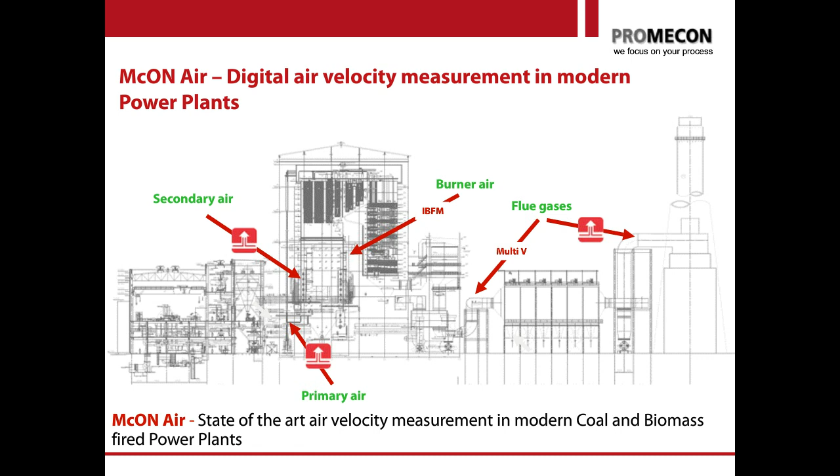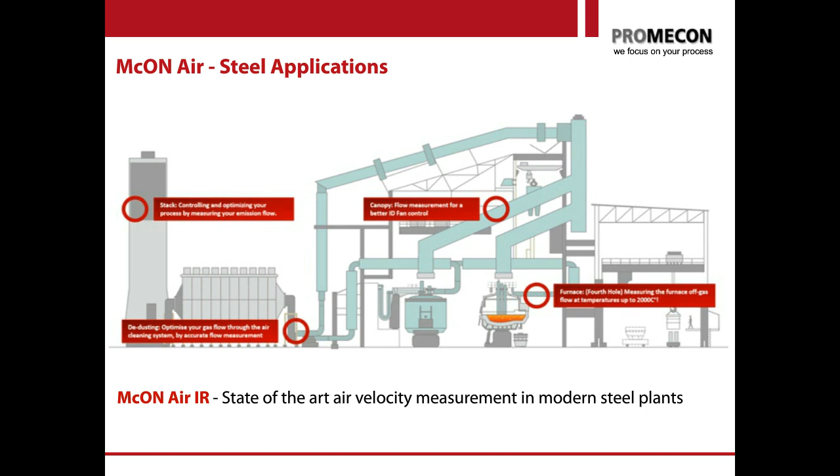So in all these industries, in these three industries I'm going to talk about and address today, we have a big interest to know the gas flow of fresh gas as well as raw gas.

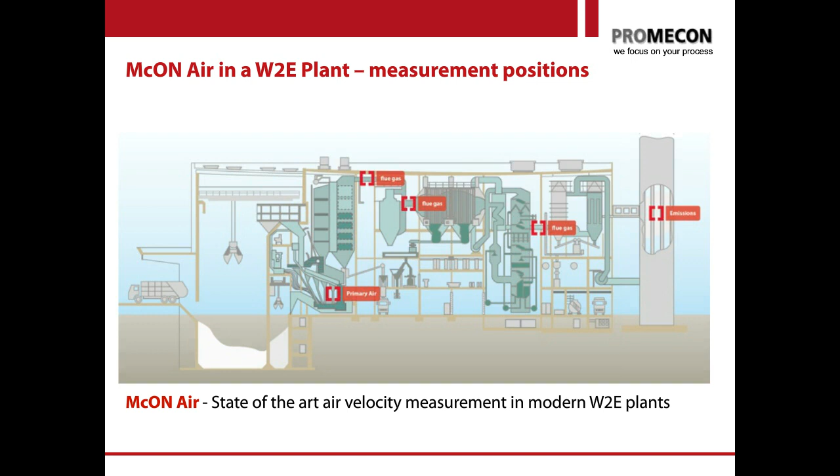Now, before I start with our measurement, I would like to give you a little bit of an idea of what are the typical problems in power stations. And I have to tell you, many of these problems are undetected. If you ask somebody from the steel industry about electric arc furnace, he will tell you, well, the gas is so hot we can't even measure it. So that problem is apparent and it's clear.

In a power station, it's a bit more difficult, because many airflow measurement problems and many airflow measurement drift problems go undetected. I would like to explain that for a few minutes so everybody is clear on what the problem really is in a power station and why it is so hard to tackle.

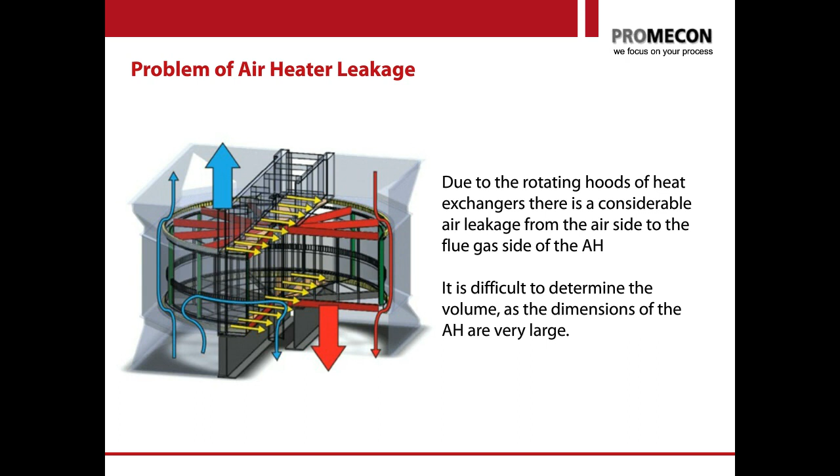Most boilers have an air heater that heats up the air going into the boiler, so that you recover the heat that the boiler is losing. That air heater is usually a regenerative or rotating air heater, and this regenerative air heater is leaking ash from the flue gas side into the fresh air side. So all the preheated air coming into your duct system will catch up some dust from the firing process. Now, it is easy to understand that this dust in the air will start to give you problems with your instrumentation, the instrumentation that measures your airflow, the conventional analog instruments that you are using today. Let me show you how this problem then manifests itself in your process.

The way you measure the airflow traditionally, for the past 100 years, is using the Bernoulli equation. You have an obstruction in the duct, and you measure the delta pressure over this obstruction: the static pressure ahead of the venturi, and the dynamic pressure in the venturi throat section.

Typically, this delta pressure is around 20 millibar for venturis. If you are using Annubars or some profile sensors, the delta pressure is even far lower, only 2 or 3 millibar.

Why is that important? First, you have a squared relationship between the pressure and the flow. That means at normal flow, you have normal pressures around 20 millibar. As soon as your flow drops to, say, a quarter, your pressure drops by the squared law. So for very low flows, you measure nearly no pressure anymore. The first problem is that you do not have a linear relationship between the measured pressure and the flow you are seeing.

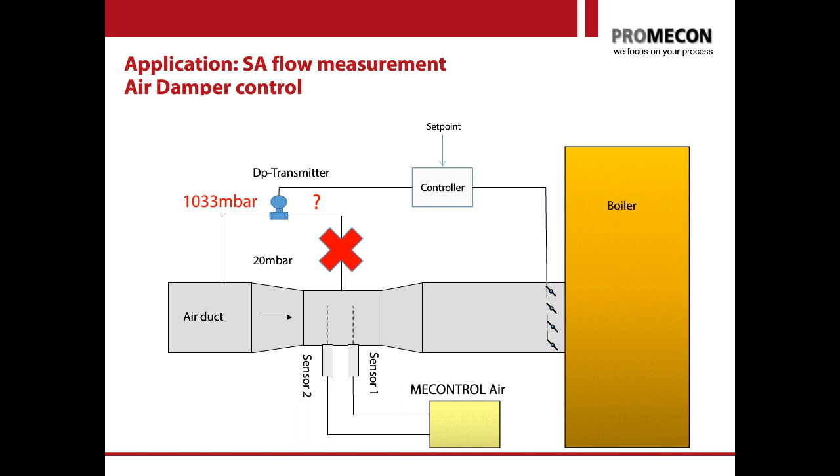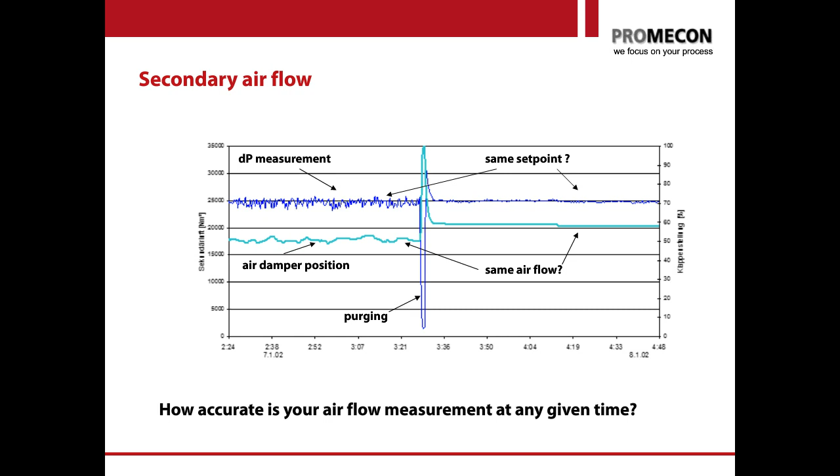Digital measurements like the PROMECON measurements do not drift. They never drift. They cannot drift. And therefore, digital measurements help you to keep your boiler on track. This is problem number 1.

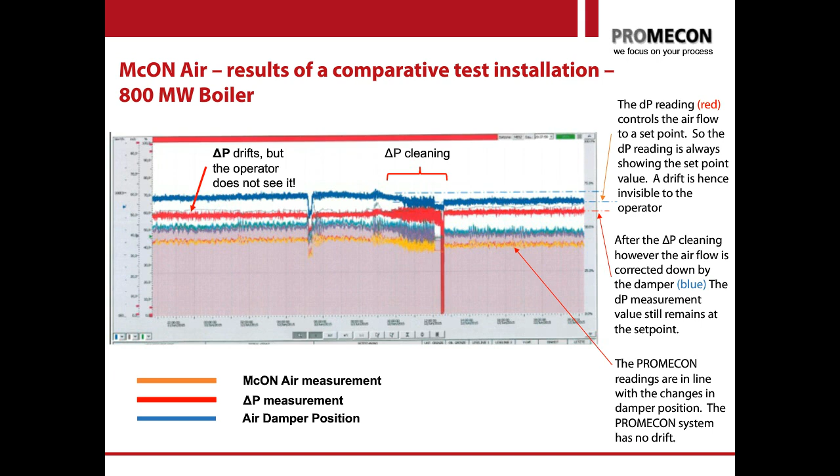Along with problem number 1 goes swinging of the flow, because the clogged impulse lines delay your control, so you start to get swings in your controls. This is also a problem that will not occur if you don't have a drifting signal, which you have in analog systems, but in digital systems you do not.

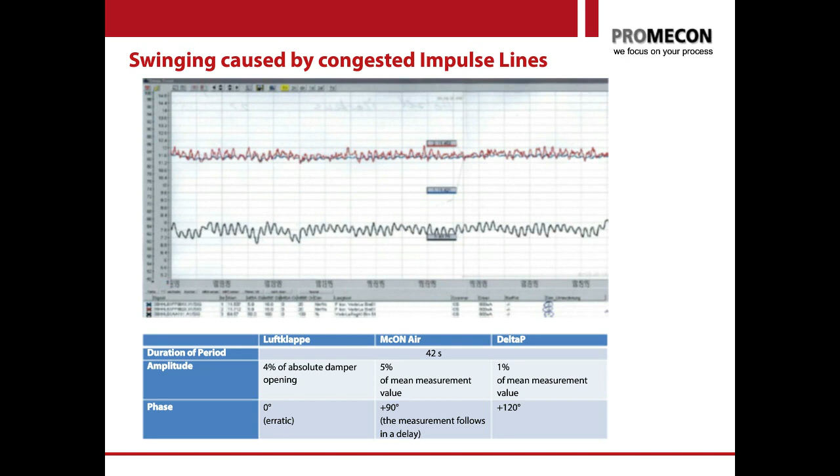Because of the inertia law, the air wants to continue sideways, but it can't, so it starts to swirl. So most of your ducts that you measure in a plant, behind an ID fan, behind the FD fan, behind bends, will have swirled airflow. How do you measure swirled airflow? That's the second big problem that we're going to address with our PROMECON measurement today.

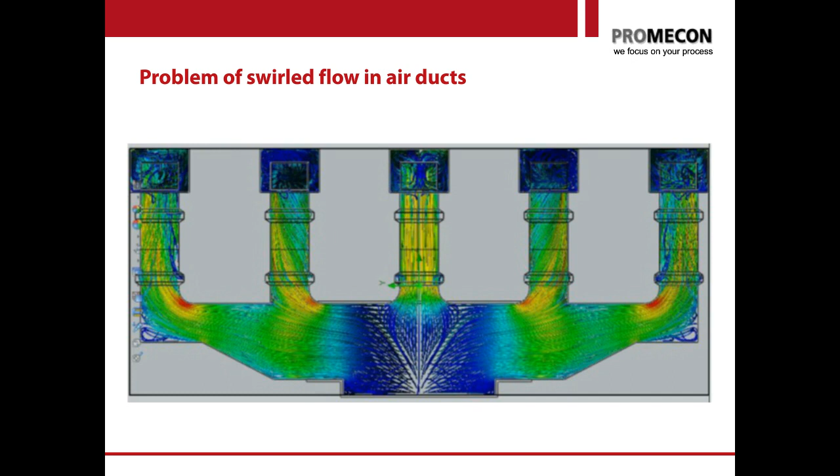So how do we cancel these? How do we attack these problems? We have drift and we have swirl. First of all, our measurement system works much differently from a delta P measurement system. The PROMECON system works by the electrostatic correlation of time of flight.

How does that work? First of all, we generate a raw signal from the dust that is carried along in the gas flow. So we don't have a problem with the dust as a contaminant, but the dust is more or less our friend. It's our tracer that we use to detect the gas flow.

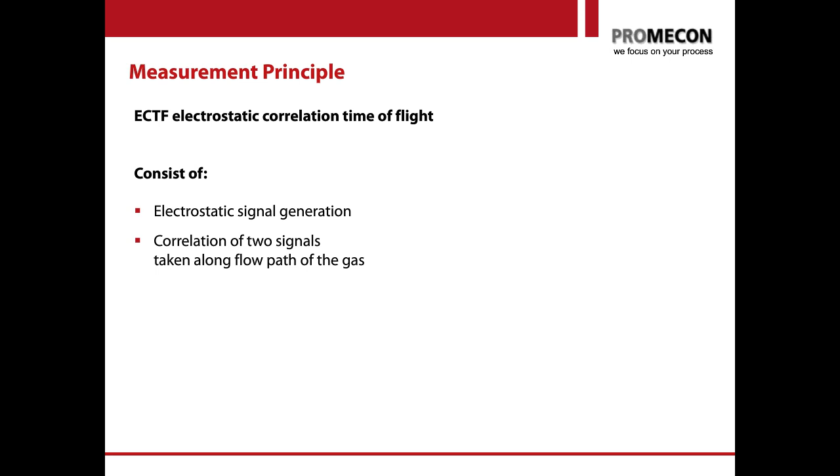The way that's done is that you have a sensor inside your duct, and that sensor is surrounded by electric dust around it. The dust that goes through the pipe is always charged with a slight electricity on the surface of the particles. So you have clouds of positive charge and clouds of negative charge.

Now, the cloud that is surrounding the sensor will automatically induce a negative or opposite charge on the sensor itself by Coulomb's law. So if you have a positive cloud going by the sensor, you will see a slightly negative charge on the antenna, and vice versa. So as the clouds of particles fly by the antenna, you can see an electrostatic charge signal, which is actually showing you the pattern of the clouds flying by.

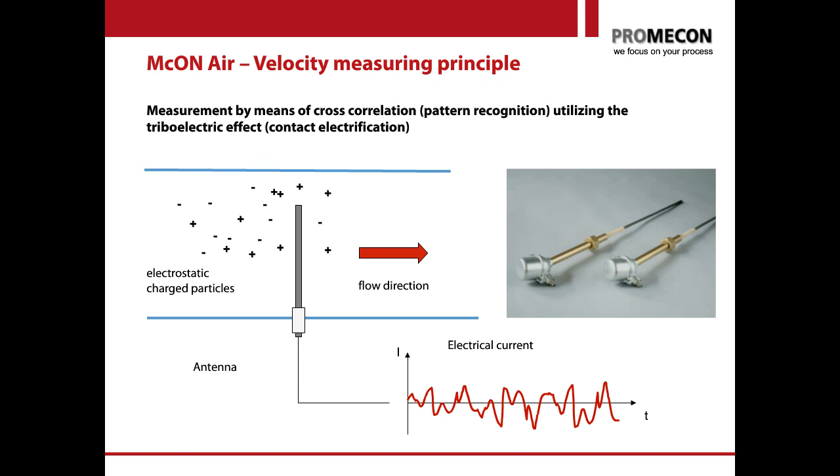We call this a time signature. So you can see in the succession of the current that you measure how these clouds fly by your sensor. The whole measurement principle uses the fact that you need two sensors to measure, a first sensor and a second sensor. The correlation algorithm between sensor 1 and sensor 2 will give you a best match at the time of flight between the two sensors.

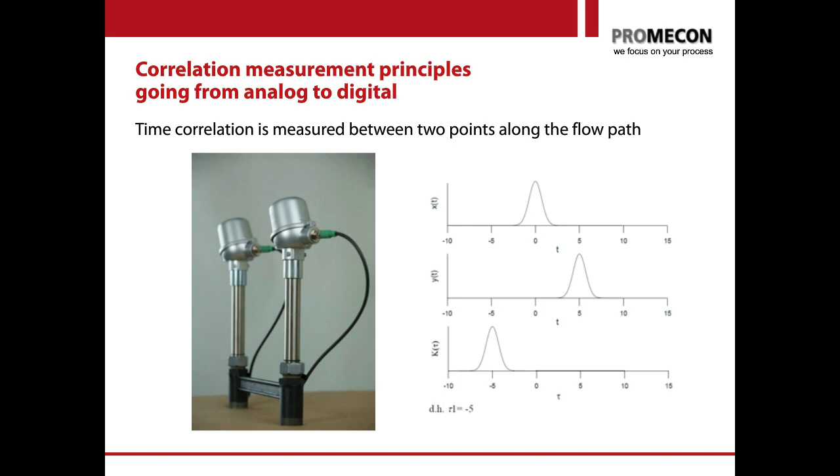So how does it look? You have two sensors and a box. You can see also how this is mounted in a duct. You mount them in the direction of gas flow. So it doesn't matter if you have a lot of dust or little dust. You mount them in the direction of gas flow, and the dust flying by on the sensors leaves a signature on the sensors.

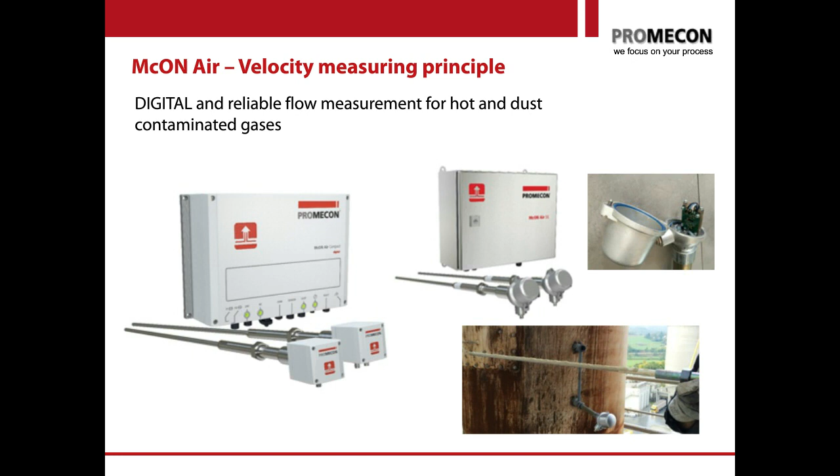So you have the signature on the sensors, sensor 1 and sensor 2. You can see with your bare eyes that these signatures are not the same, but they have a very big similarity. And this similarity is what our correlation algorithm is detecting. We are detecting similarity between signals.

This is very, very important, because this is what makes this measurement digital. We don't care how big the amplitude of a signal is. We only care if it's similar to the other, right?

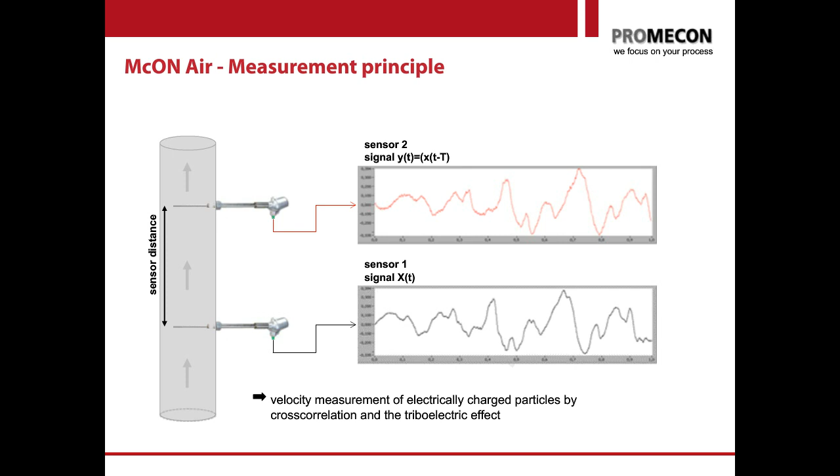So let's put them on top of each other and see how similar they are. You can see these are the two signals. They are similar, but they have a time shift. They are not the same.

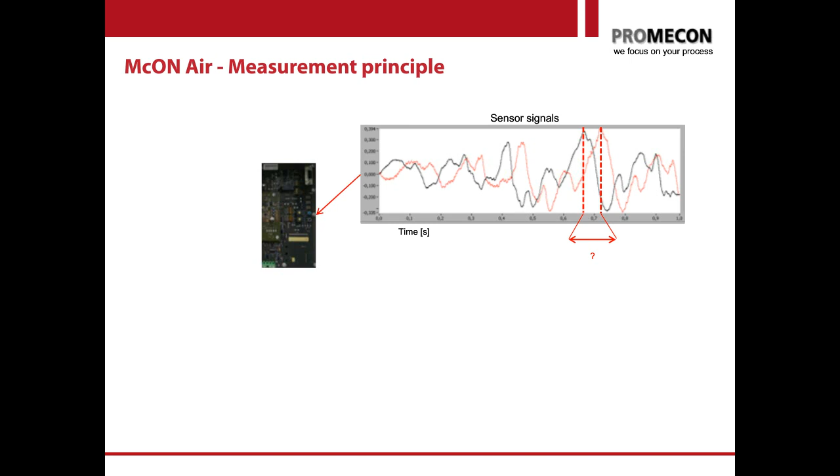So what we do now is we take those two signals and put them into a cross-correlation filter, and we get the cross-correlation function. The cross-correlation function gives you a maximum at the time shift where these two raw functions have the biggest match. So we see a time shift, in this case 52.1 milliseconds.

So what our measurement does, it has a digital clock, and all it does is give you a time shift every second. So every second you get a new value for time shift. Now, if you take the distance of the sensor and you have your time shift, then time shift and distance of the sensor gives you velocity. So our system is a gas velocity measurement system, right?

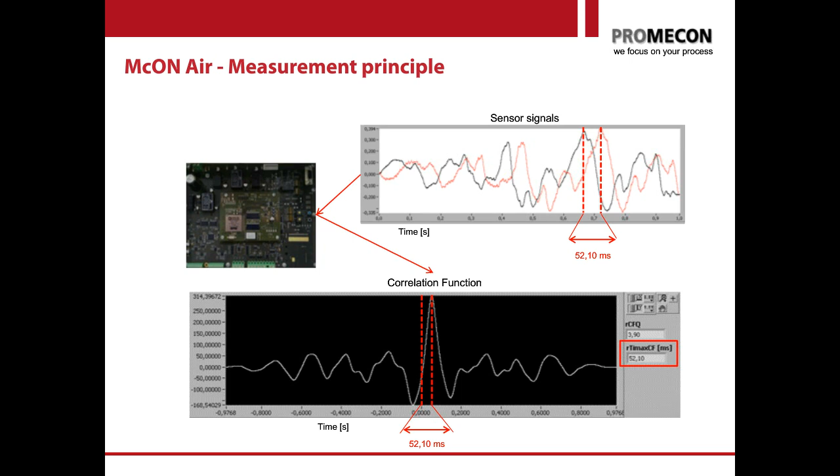So this is the primary measure that you get from our digital flow system. And the characteristics of the typical electrostatic system is that you can measure up to gas temperatures of 1,000 degrees Celsius. You can measure gases that have no dust up to 3,000 grams of dust per cubic meter.

You can measure in the typical accuracy, if you have a good flow pattern, of a few percent. You measure at a very high repeatability and absolutely no drift. So these are the main characteristics.

And as you can see on the left-hand side, where in a delta P measurement you need to purge and clean from time to time, and you need to recalibrate, you need to re-zero, all this is gone with the MCON Air digital measurement.

You put this measurement in, and then you can forget it. It will measure accurately throughout its life. It will not drift, never.

And as mentioned, you can also get our measurement as a SIL2 accredited system according to EN 61508. So safety integrity level 2, that's usually the standard or the demand for new boilers if you want to measure purge air in a boiler, or you have any other safety relevant application where combustion air is critical.

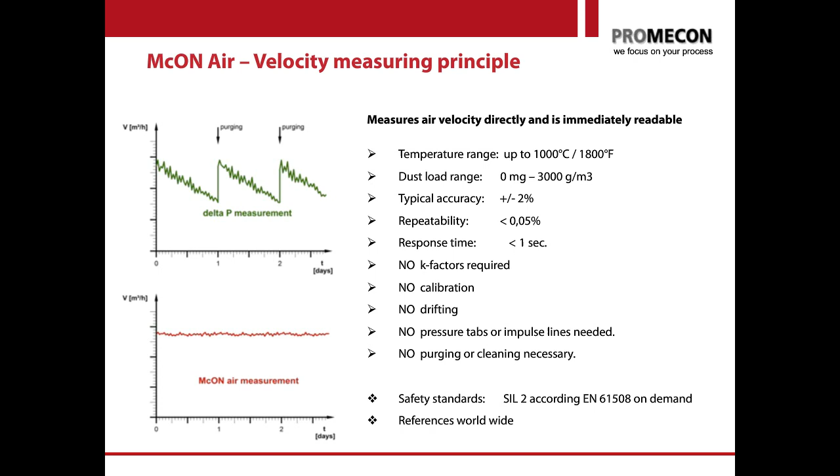Now, I was talking about the distance of the sensors. The distance of a sensor is a very interesting and important feature of our system. Why? I have mentioned to you that one problem is the drift because of the dust. The other problem that I've mentioned is the swirl.

The swirl means that you do not have a straight flow over your sensors, but you have a flow that has a lateral component, right? So the flow does not go over your sensors in a perpendicular or orthogonal way, but it can flow in some sort of direction, sort of like this, right?

So what kind of velocity are we now reading? What kind of velocity is our MCON Air measurement reading? Well, our MCON airflow measurement system is calculating with this distance of the sensors, right? So the distance that we assume is the vector that's orthogonal on both sensors.

And this is extremely important. The PROMECON system only measures the flow vector that is perpendicular to our sensors. We don't measure any other component. So when you have swirl, we don't see the swirl. We only see the vector that's perpendicular on our sensors. Very important point.

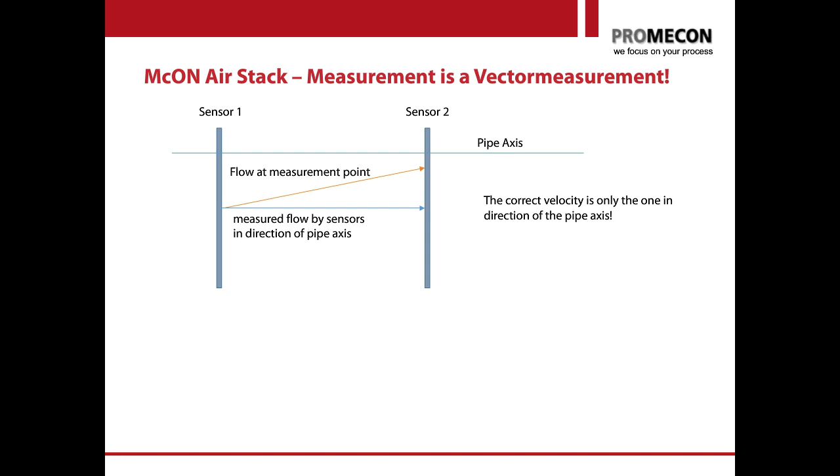So the correct velocity is only the one in the direction of the longitudinal axis of the pipe. PROMECON has a special system which is also built into coal burners, where we put two sensors on the burner barrel. And as we sit downstream of the swirl element, we have a huge swirl over the burner barrel. But these two sensors are only sensing the velocity along the burner.

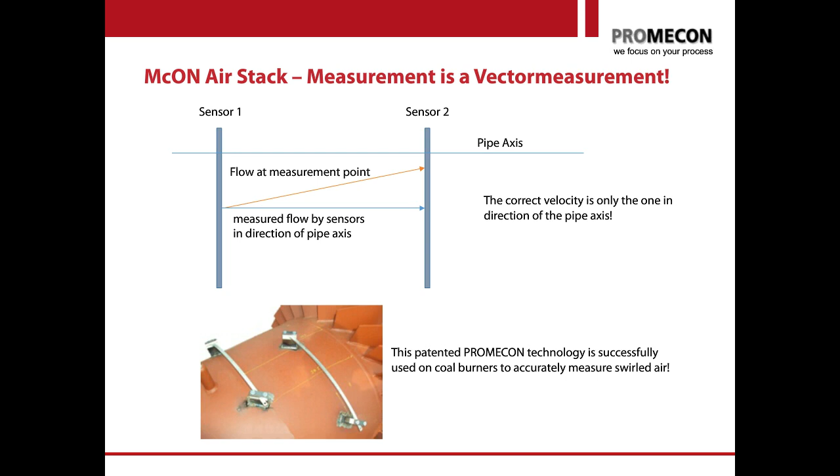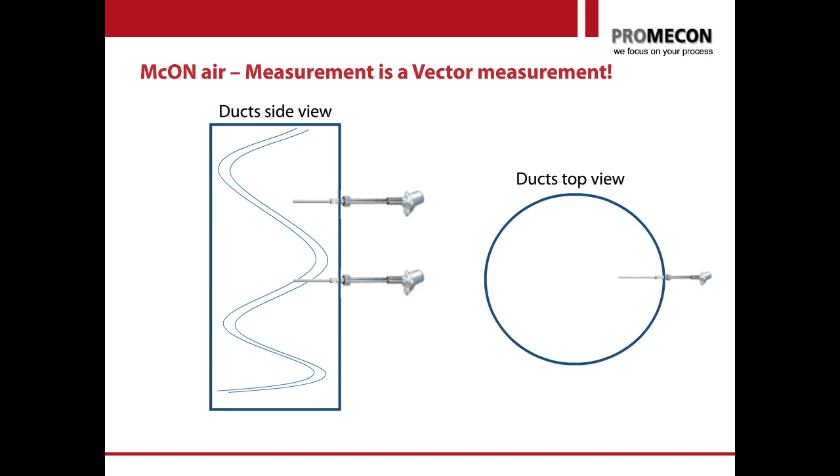Now, this is also important, for example, for stack applications. If you look into a stack, you have an ID fan, and the ID fan will always swirl up the air through the stack. Even at high elevation, you will have some sort of swirl that goes through the stack, and that needs to be measured.

Now, our sensors will only measure the vector that goes right up the stack, and they will not see the swirl. We just received a certification for our stack flow measurement by the Deutsche TÜV, and we are quite proud that the TÜV mentioned to us it is the most accurate stack flow measurement he's ever certified.

And you can see that on the TÜV page, TÜV Süd, the QAL1 certification. There are the accuracies of all the emission monitors that have been tested in the past years from all the manufacturers, and the one that is PROMECON has the highest accuracy.

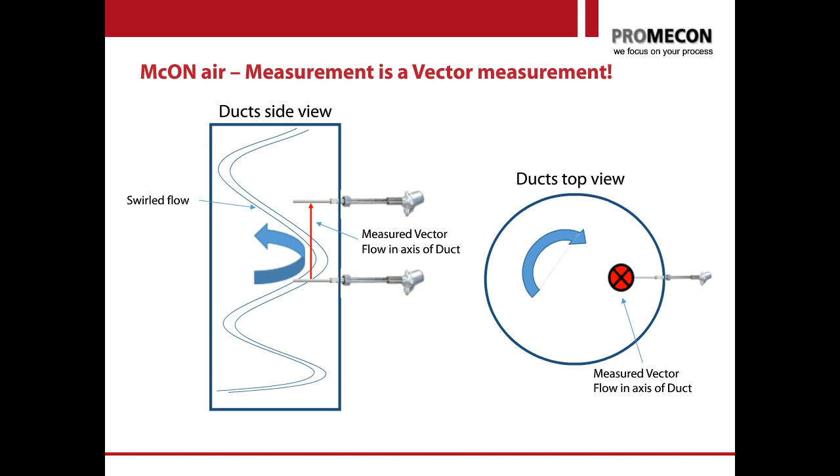Now, I mentioned a few minutes ago that we can measure from 0 milligrams of dust. Some of you might have asked yourselves, if there's no dust, how do you measure the gas flow?

PROMECON has invented something called the range extender. It's a rod mounted upstream of the sensors. This range extender ionizes the gas with a small pulse of electricity, a little bit like a spray electrode in an electrostatic precipitator. This ionization also passes over our sensors, leaving a signal so we can measure the gas velocity from the ionization.

Where is this ionization necessary? We recommend it for all power applications, because sometimes when you start your boilers, you run with very low air velocities, and when you start a mill, you sometimes run with clean air. We also recommend the range extender for batch processes, like a dedusting system in a steel plant, where you sometimes run clean air.

So the range extender extends the range of dust that you can still measure, but it also does another thing. It allows our measurement to measure not only from 8-9 meters per second, but down to 3 meters a second. So now our measurement can measure from 3 meters per second up to 100 meters per second, and it is completely linear. So the turn-down ratio is very big, and at low velocities we still measure very accurately.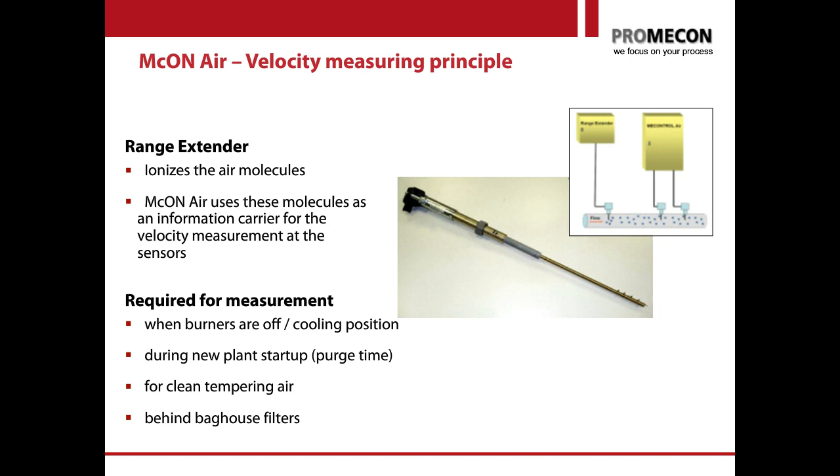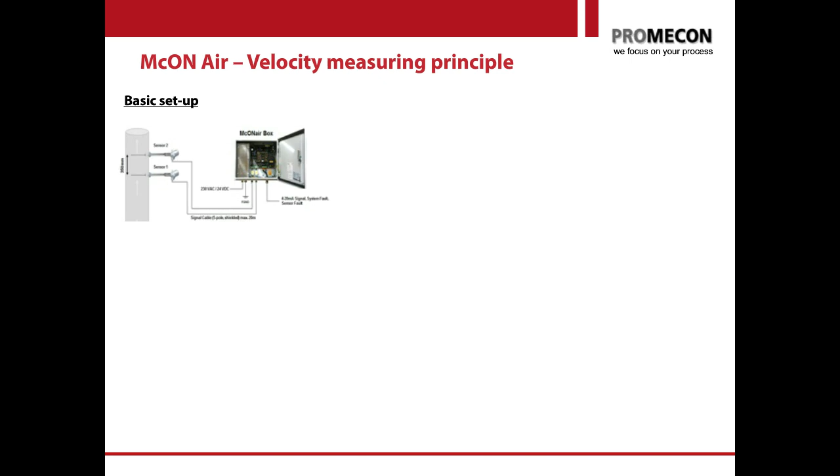Okay, some technical features of our measurement. This is how the measurement looks like. You have a small box and 2 sensors. That's the basic setup. There's also an extended setup where we measure temperature in order to compensate the volumetric flow into standardized gas flow.

And if somebody wants, you can also measure static pressure. In most thermal processes, however, the static pressure is basically the barometric pressure, so temperature has the biggest influence on gas density. You can either measure the temperature separately and calculate this in your DCS system, or calculate it in our box. That's everything you have: a small box, a couple of sensors, and out comes a 4 to 20 milliamp signal and system fault.

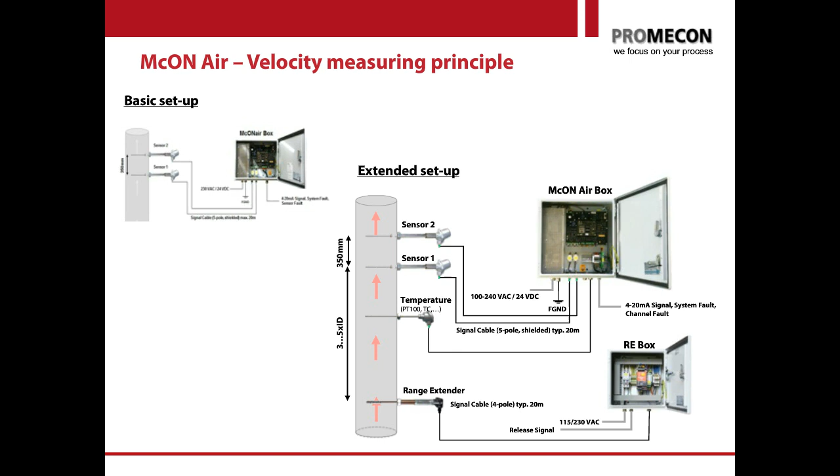Now, I have not spoken about electric arc furnace, and I have not spoken about high temperatures. We have a lot of clients in the world that use electric arc furnace, and they are very interested in our sensor. We have lots of clients - Tenova, Mittal, Arcelor, in the US, all over the planet actually. What these people have been complaining about is the fact that they cannot go right to the 4th hole, which is exactly the opening that comes off the smelter bath.

For many electric arc furnace operators, it's very interesting to understand how much enthalpy they are pushing out of their electric arc furnace into the stack. For this, they need to know the gas velocity. Now, how can you measure gas velocity at 1700 degrees C? This, of course, is impossible with electrostatic measurement.

So PROMECON, in recent years, has developed a system that uses infrared light emission of the gas from the electric arc furnace, and we correlate the two light rays the same way we correlate the electrostatic signal. So what we do is look into the process from one side only. It's a passive system - nothing looks into the process. And from that we can calculate the velocity that comes out of the 4th hole directly into the dedusting system.

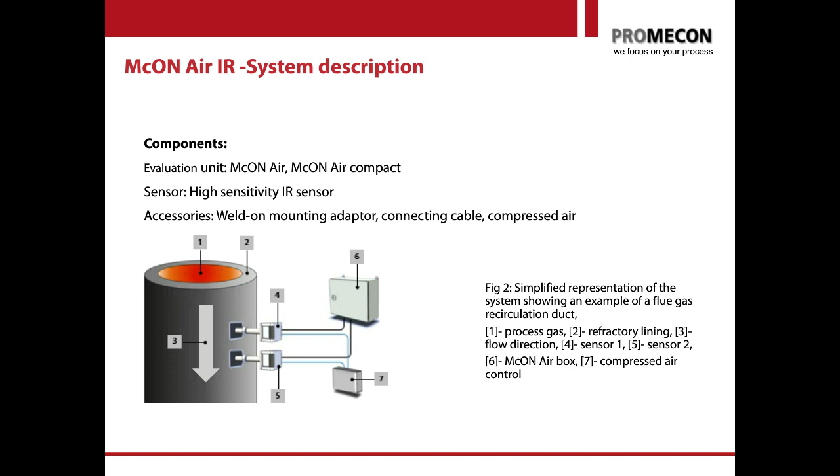Here you can see how it is applied. You have two flanges. The two sensor heads go right on the flanges, and that's pretty much it. The sensors themselves are cooled with nitrogen because we have very high temperatures right on these ducts.

And the openings that we need for the sensors are usually 25 millimeters times 5 millimeters. So if you have a small gap between two water pipes that are cooling the hot gas on a fourth hole, a very small opening is enough. So we need two small openings where we can fit our flanges to and then mount our sensors onto that.

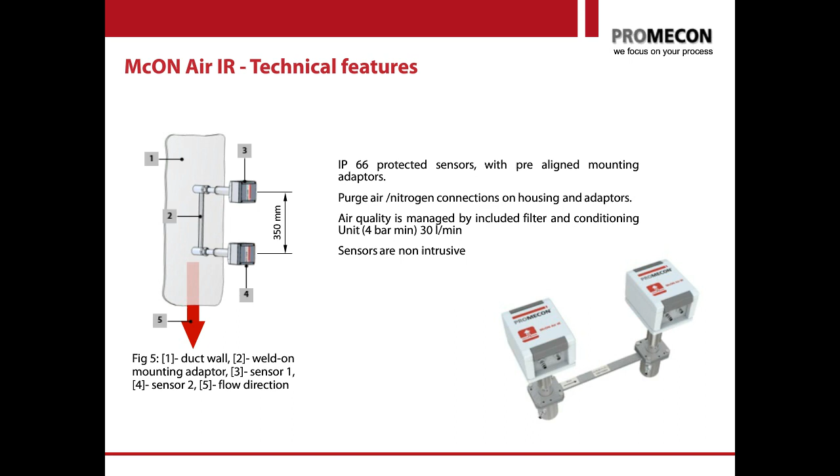Again, I would like to sum up the motivation. Why do you want to install the PROMECON measurement system? Well, let me start with the steel and smelter guys and the cement industry. Everybody who is in this rough industry has no gas flow measurement that works. So for all these rough industries, I think our measurement is the only choice that can be used to measure enthalpies, flows, etc. For the power stations, the typical power stations and waste incineration plants that have delta P measurements,

you are suffering from blocked impulse lines, and these blockages cause long-term drift of your signals. And because your measurements are all controlled by dampers, your control system will always control your signals to a set point, and therefore your operators cannot really see what's happening.

Let me tell you a story from India, because I'm sure I have a couple of Indian listeners. I've been to many Indian power stations, and what the operators have been telling me over and over again, they say, 'Sir, if we switch off automatic control, the whole system, the whole boiler runs much more smooth.'

Why do you think they tell me that? They tell me that because the problem is not the control of the boiler. The problem is the measurement of the airflow, because the measurement is drifting and jumping around and unstable.

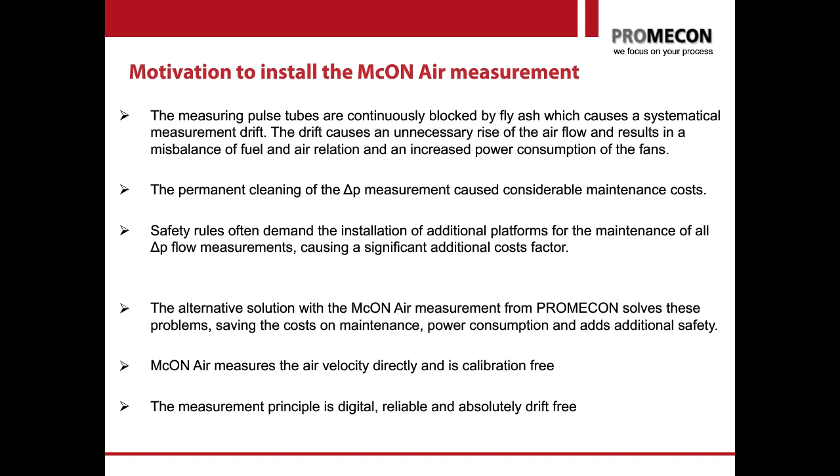So, a little bit of an overview. How is this system set up? You can see in this picture very nicely. You have your duct with your two sensors on the bottom of the picture. You can have the range extender on the left-hand side of this duct prior to the throat section. Then you have the range extender control box, and you have the McON Air SIL box. This is all part of our scope of supply, including the sensors.

And then you have the energy supply, which can be 24 volt DC or 230 volt AC. In fact, our AC supply is a wide range supply, so it can be anything from 100 volts to 240 volts. And it can be 50 hertz and 60 hertz. We are talking to the whole world on this webinar, so if you have 60 hertz, it doesn't matter at all. And then, of course, it goes all out to the control system, the 4 to 20 milliamp signal,

and from there it goes into the DCS control loops. So very simple, straightforward measurement. You don't need impulse lines, you don't need purge lines, you don't need any of the plumbing that you've had before. Only the two sensors and the control box is enough.

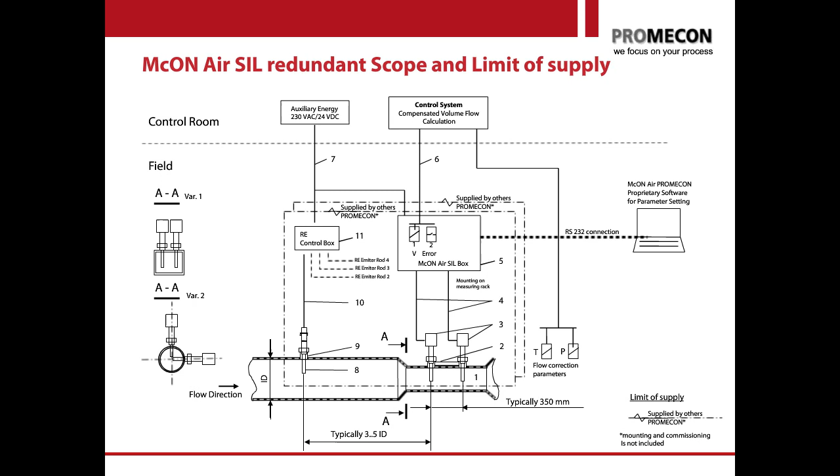Our technicians were so nice to crawl into this and have a look. This boiler had everything equipped with delta P measurement, and after it went into operation only a few years ago, they noticed they have a drift problem, and this boiler has completely replaced all of their delta P measurements with our measurement.

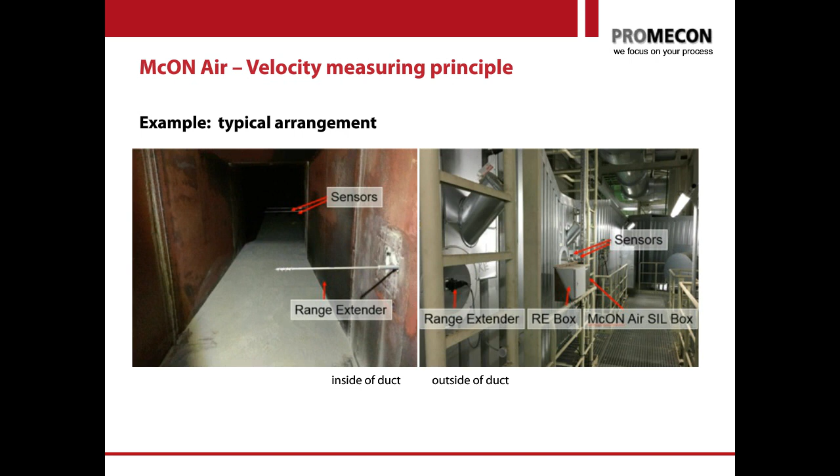This is a Chinese boiler, built by Harbin. Also, this boiler has delta P measurements everywhere, and it's located in Turkey, and the Turkish client had such big trouble with this delta P measurement that they replaced everything with a digital measurement from PROMECON - primary air, secondary air, everything.

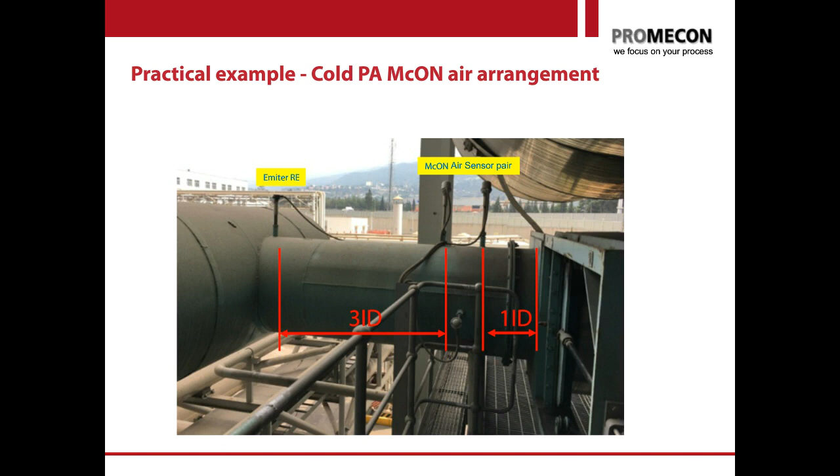This measurement location is from a Mitsubishi Hitachi boiler, 800 megawatts, ultra supercritical, in Germany. Mitsubishi Hitachi put our sensors in from the start, so some of their boilers were equipped with our digital airflow measurement from the beginning of erection. Two or three boilers in Germany were not equipped with our stuff - they had delta P measurements, especially the boiler in Wilhelmshaven and the boiler in Rotterdam. These boilers are now replacing all the delta P measurements as well with our digital flow measurement.

So all the ultra supercritical boilers go digital.

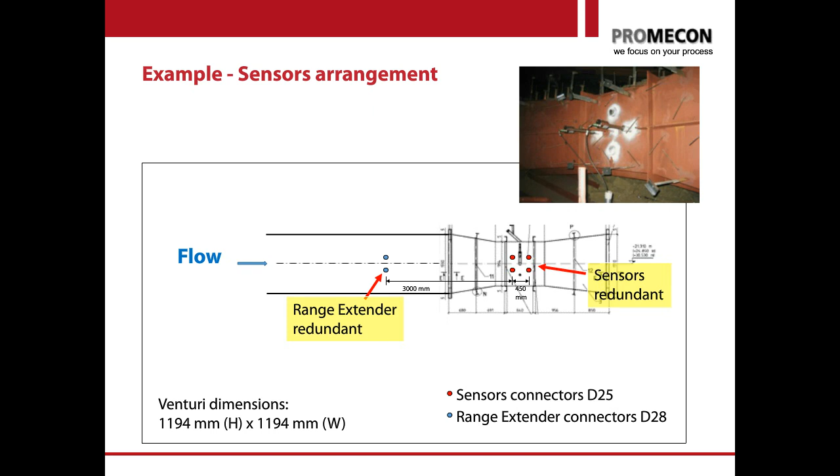Many clients ask us, how many cubic meters per hour can you measure? That is simply a function of the size of your duct. And I'm sure I will get some questions from you on duct sizing and duct location.

That is, of course, a very important point. When you have a large boiler, usually you have no straight run where you can put this. So here, PROMECON will help you spot the ideal location.

If you have existing venturis, existing airfoils, any change of cross section in your piping, then this is a very big advantage, because any venturi, any tapering of your duct down to a smaller cross section is a flow straightener to your flow. So if you have an existing venturi, even if the standard says you need 5 or 6 D straight run upstream of the venturi - that is correct, because you measure the pressure ahead of the venturi and in the venturi. But for PROMECON, we only measure in the throat section of the venturi. We don't care about the stratification or the gas layering ahead of it. So for us, it doesn't matter, and therefore, if you have existing venturis, it's an ideal location to measure.

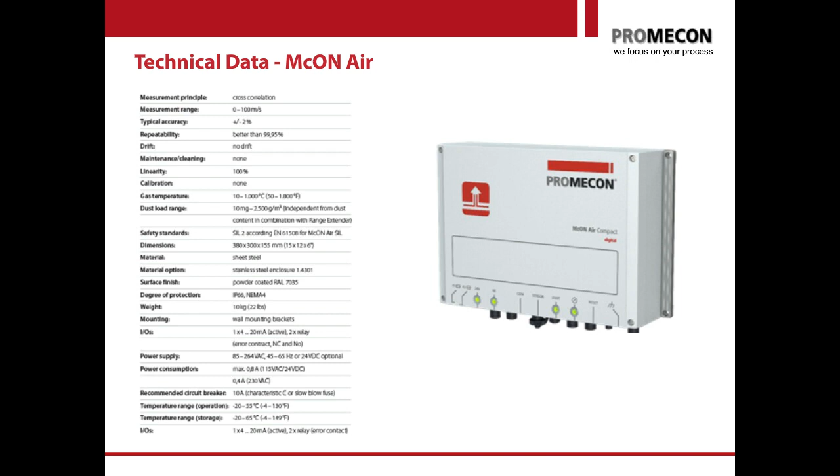Here you can see the spec sheet of our sensors, the SIL sensors, and the range extender. So these are the boxes. We are happy to send you some of that.

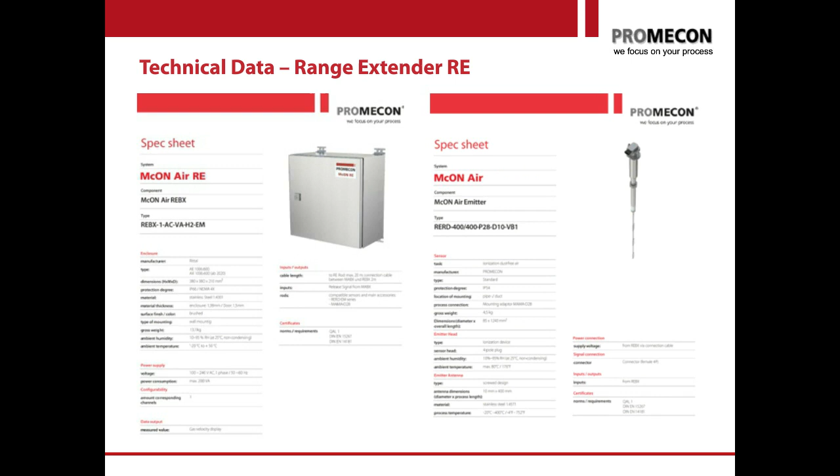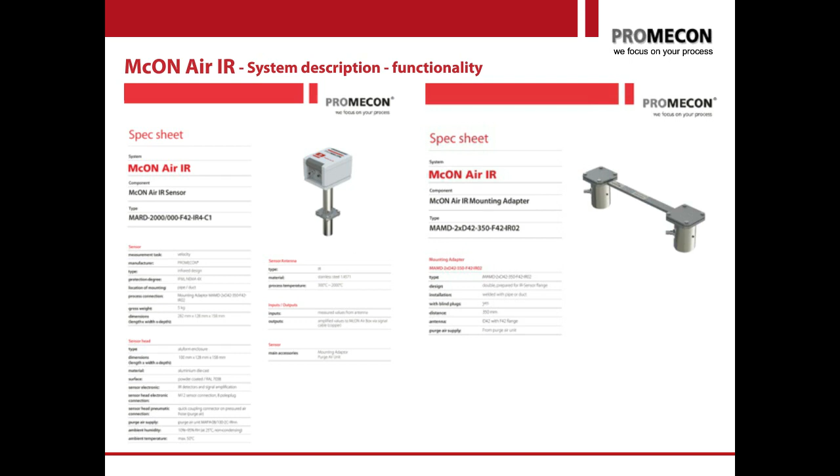So this is pretty much the end of the presentation. I hope that you have gotten an impression of digital technology and what it means. I think there are so many aspects in your plant, regardless of which application we're talking about. Usually you can go on to talk about applications forever. This was meant to give you a first splash, a first idea of what is possible with digital measurement technology today.

We have thousands of these installed worldwide, and we hope to have many, many thousand more in the future. I believe that this sort of measurement for thermal process gas flow will become a standard measurement in the next 10, 20 years, because the advantages over conventional measurements are simply very, very big.